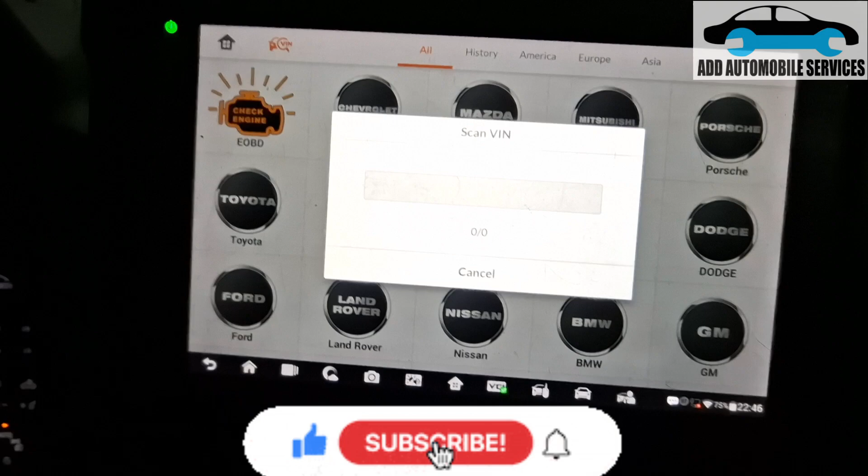So I was called to diagnose this vehicle, and the issue is the remote is not working. If you place the remote in the remote cup, it will work. Let me shut it off. You can see my light turns on. So that's the only place that it takes signal from.

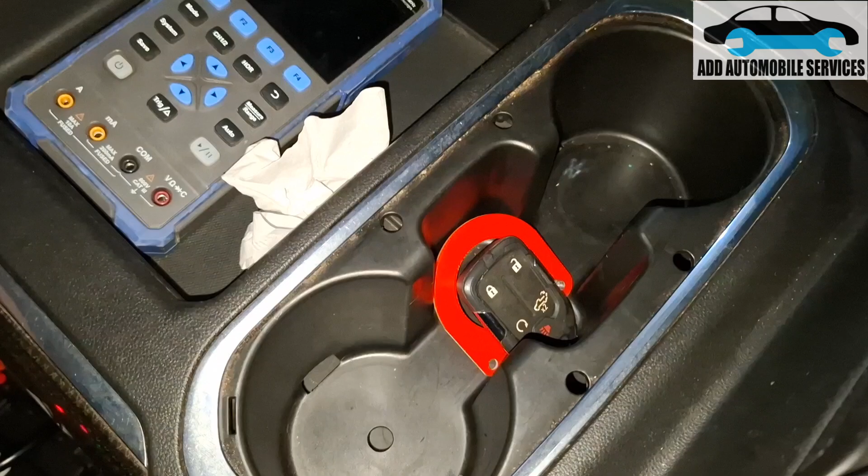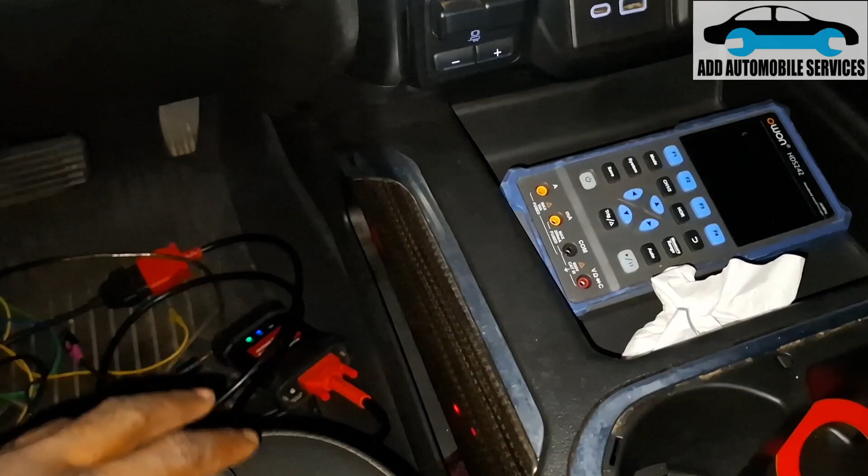With this GM, you have to turn on the key for a while, then wait for like 10 to 12 seconds, and it will turn on automatically. So it turns on when the key is in the armrest. When the key is not there, it will not work. So let me turn the ignition off. Now that the ignition is off, when you press the remote, it doesn't work.

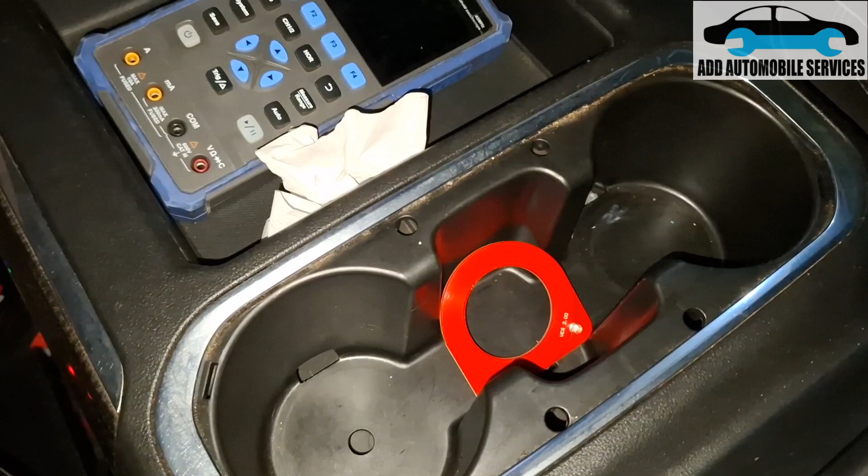So I'm here to diagnose it. I've diagnosed it, so what we did was we changed the BCM, and still the problem was persisting. The remote, you can't even turn on. The moment you try turning it on, it tells you no remote detected, and you can see my light is flashing because the remote is in the car, but it is not in the cup, the armrest, so it will not work.

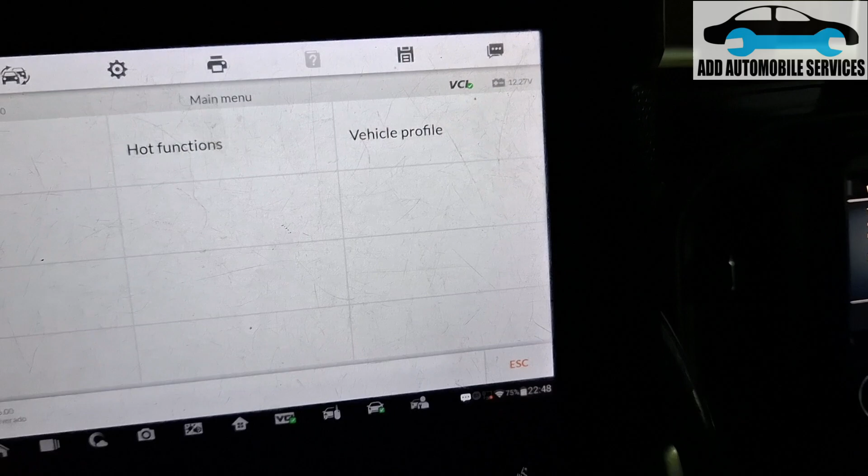So let me turn the ignition on. Before the ignition can be on, I have to place the key here. The light wouldn't flash for long, so we'll wait for that 10 seconds. Now that the ignition is on, let me select any of them and let's move to it. So when the key is in the cup, the armrest, it will work.

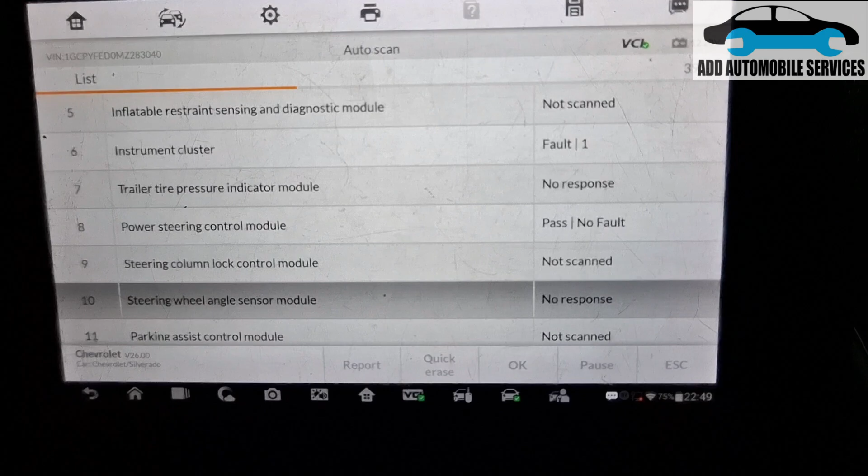And we've programmed a new BCM, and the problem is still persisting. But with this issue I was able to identify the problem, so we'll just move straight to the point so the video will be short. So you scan it and you wouldn't get any fault code in the system, and if you check online or read much about it, you won't get much information about how the system works.

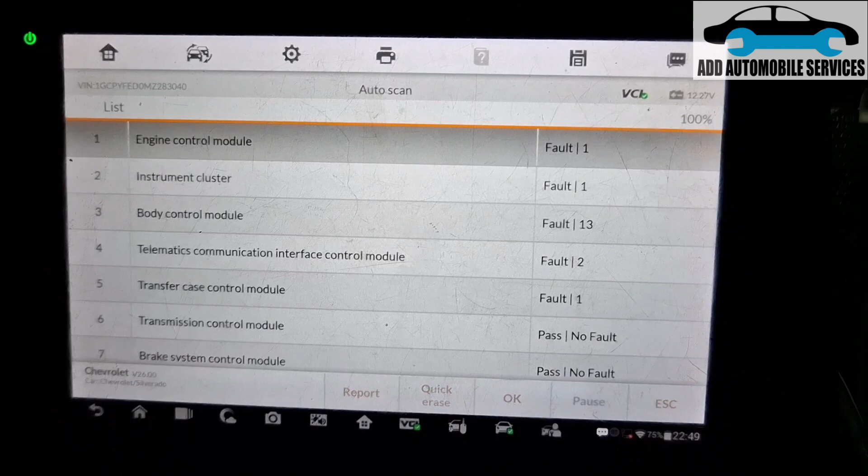So you can see I'm having 13 fault codes. Let me erase all of them. There are not any major problems, so let me erase all of them, and let's get to the main issue. After erasing all of them, you wouldn't get any issue that much. So you can see there is no fault code.

So let me turn off the ignition and turn it back on, then rescan it and see the fault code that I'll get. After scanning it again, there is no fault in the system. I'm only able to scan some few modules, so let me check why.

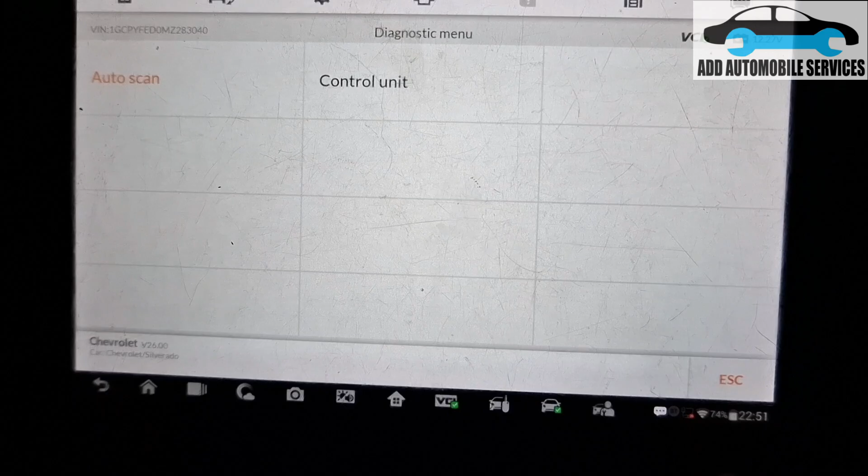Now I'm able to scan most of the modules, almost 18 modules, so I'm able to scan all of them. Let me erase all the fault codes and see the remaining one, because I disconnected the BCM. What I did was maybe my breakout box was causing the issue. I was using this breakout box, so I think that's why I couldn't scan the whole system. So now there is no fault code in the system.

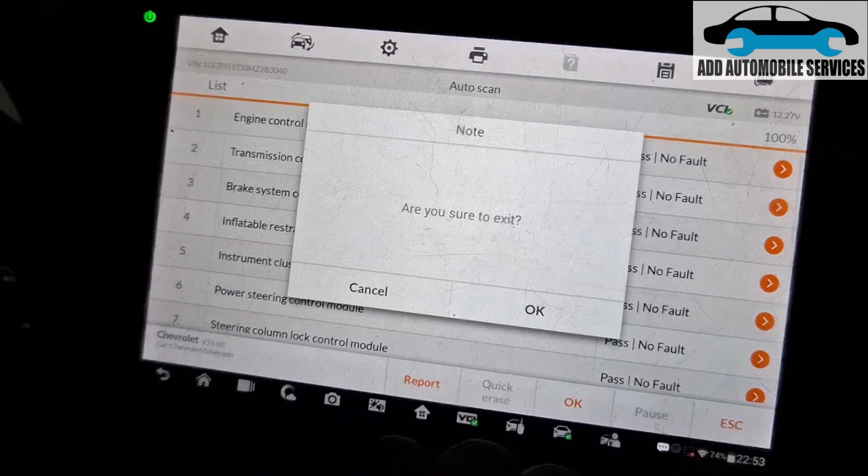Let me rescan it. This is where the issue is. There is no fault code to guide you on what to do actually, to tell you oh, this is where the issue is. Let me turn the ignition back on. So we'll wait to see.

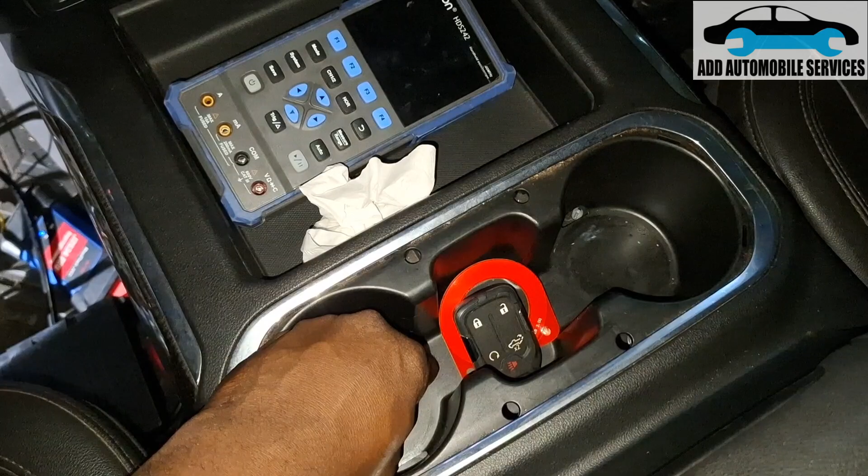I'm able to scan all those modules, and there is no fault code to guide you. Every antenna in the vehicle, there's one antenna behind the radio, it is working perfectly, and there is this antenna also. Even if you disconnect the keyless control module, this car will still start because this thing is linked to the BCM, so it will still start. The sensing unit in the cup holder at this place is linked, I think, directly to the BCM.

So even if you disconnect the keyless module, this car will still start. And this car has a keyless module and a remote control. It has a remote control receiver and it has the BCM. So these three units consist of the vehicle starting and responding, and there are other antennas in the door handles, like two antennas in the door handles. So now that there is no fault code, this is where we get stuck.

And hopefully God helped me, Holy Spirit gave me wisdom to go about it. So what I'm going to do now is test the signal on the remote control receiver.

That's what should receive the signal, the key frequency and everything. So if the remote control receiver is not receiving the key frequency, the car is never going to start. And even if you disconnect it, the BCM will not be able to see that it has been disconnected or that there is any issue with it.

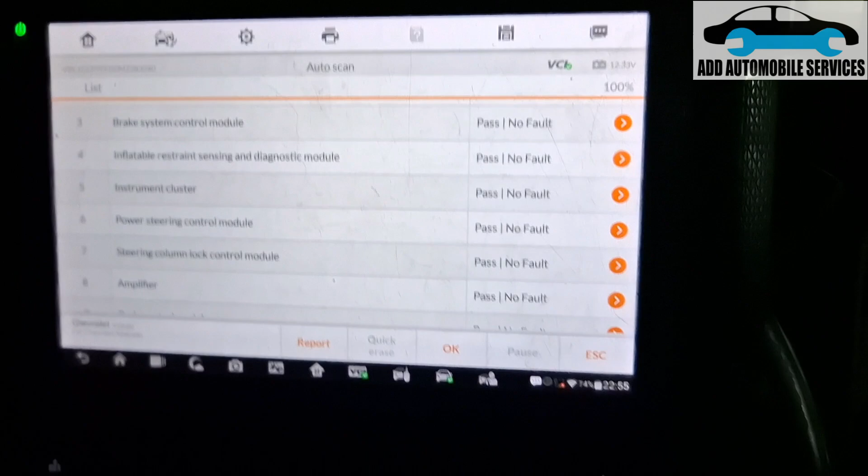So even if you check our BCM, this is the BCM. There is no fault in the BCM. Let me do it double, let me go into it again. There is no fault in the BCM. So at this point, there is no fault anywhere for us to go.

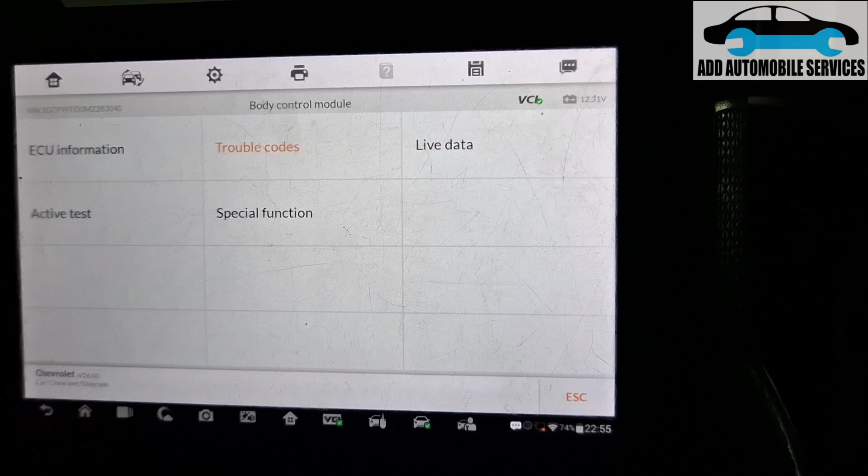So what I'll do is go and test the BCM. The remote receiver has 4 wires. Let me check, let me bring you to my wire.

So this is the keyless control module, and the keyless control module has antennas, 1, 2, 3, 4, 5, 6, and you can see this communication line. So what I'm going to do is scope this communication line anytime the BCM is active or any signal is being sent related to the key frequency and the key ID. This line, this network should be active, which is the communication line should be active.

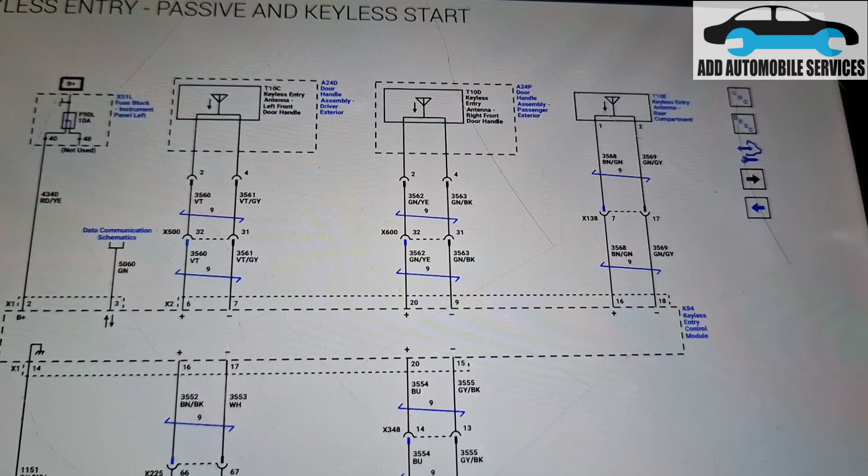So what I'll do is now let me show you the wiring diagram. This is the OEM diagram. Let me show you the wiring diagram of the antenna, of the remote control receiver. So this is the connection.

So this is the remote control door lock receiver. If you can see, it has power and ground. I've tested it and my power and ground are okay, and both power and ground come from the BCM, and it has two communication lines.

You can see it has two communication lines. There is yellow and green, then there is blue and white. So it has two communication lines. So what we are going to do is test both of them. The whole thing is, I tested both of them and they were giving me signal.

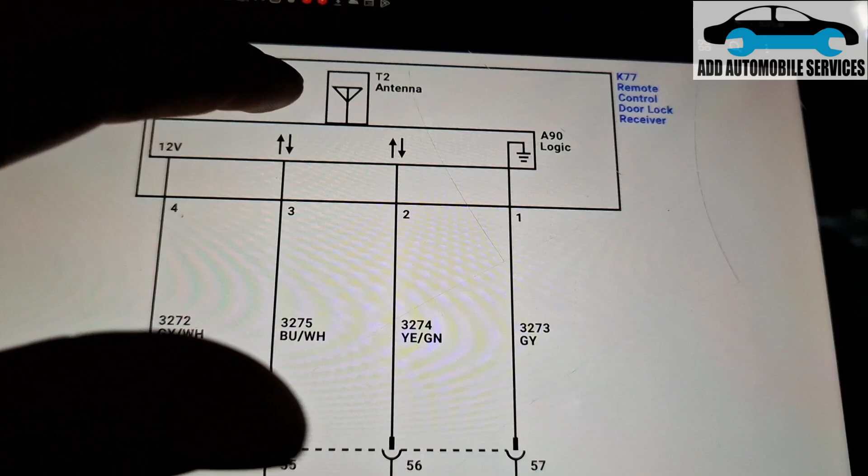So the 2 brings signal to the unit, then the 3 takes it back. But what I did was I shorted this to ground, the 3 to ground, then I started receiving signal from it to the BCM. It started sending signal to the BCM. Do you get it? So we will do that test, then we'll see the signal that it will send to the BCM, then we'll take it from there.

So now what I'm going to do is, I've tested all this way, so I'm going to test it again so that we'll see what we are talking about.

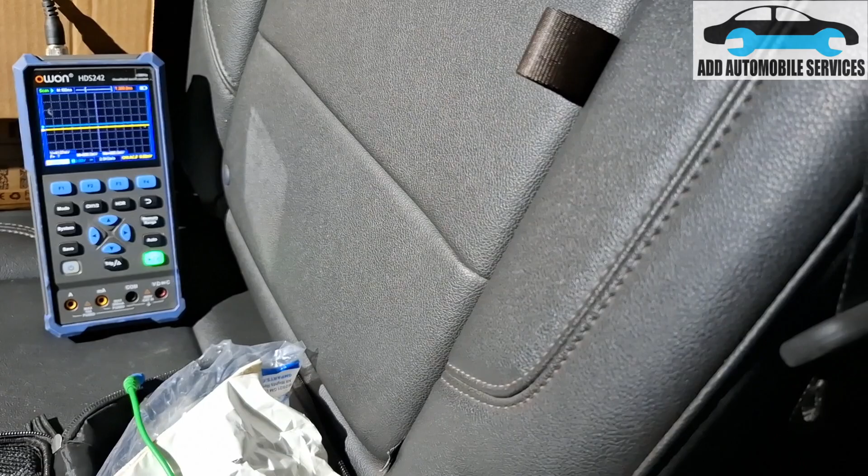So now I've set my scope up. So this one I'm going to test, one has to be power, which has to come from, so there is the location of the remote receiver.

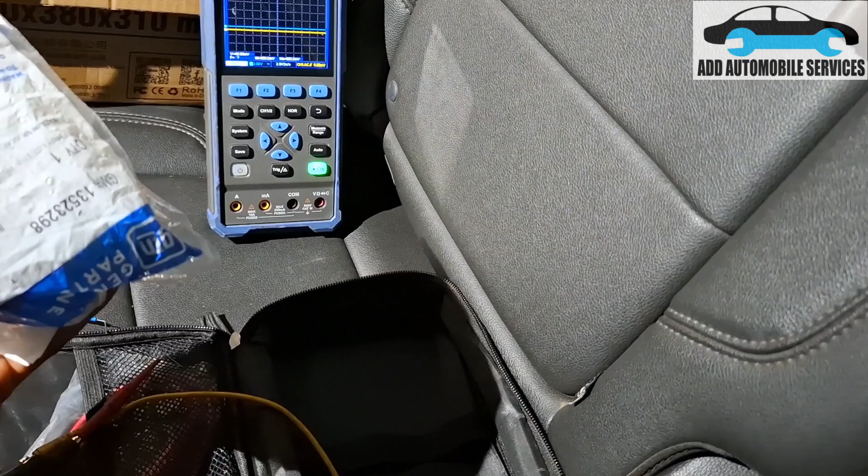So there it is. The customer already bought the BCM, and I diagnosed it and told him he should get me a new remote receiver. So he got the remote receiver for me with the same part number, and the problem was it was still not working. That means I made a wrong call and it was still not working. Sometimes you make mistakes. Same part number.

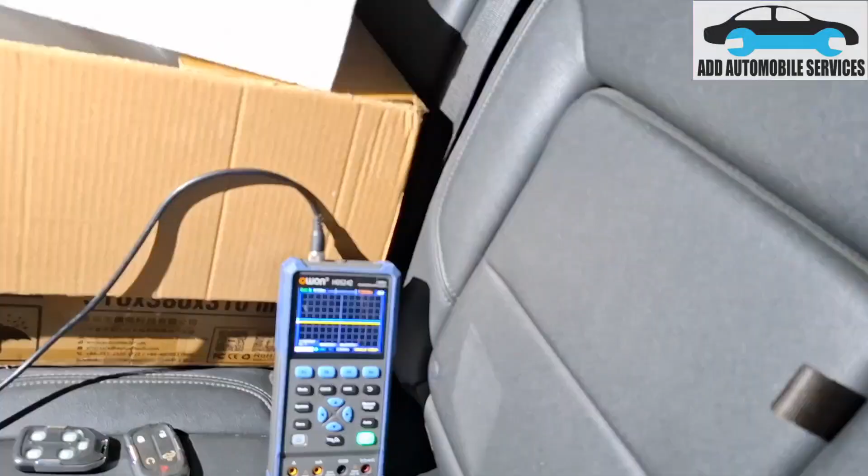So now what I'll do is let me disconnect so that we see the 1 and 4, one has power, one has ground, then the 2. So let me do it, you can see my test light turns on because I've connected the 1 and the 4. So that tells me that my 1 and 4 have power and the power is coming.

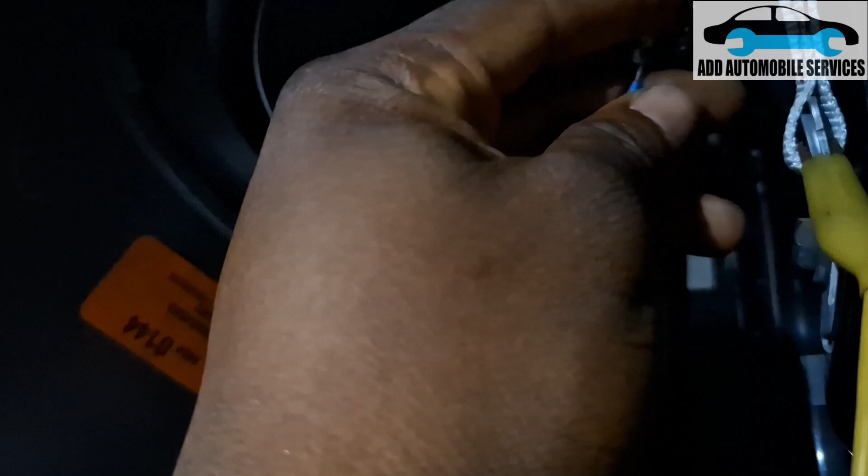So even if you disconnect this thing, the BCM is not going to see it and report any fault. So what I'll do is let me use the scope, and anytime you can see this, my scope is active, anytime there is signal, it will send signal to the BCM. So let me start and see where my power is. So that's my ground, that's the 4. If you can see the colors, that's the 4, and let's go to the 3.

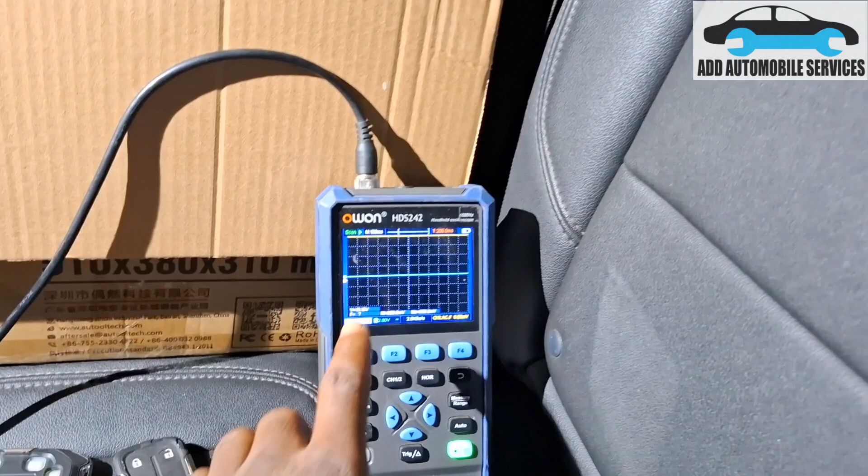So if I change my voltage, let me bring it to 5, and you can see now the voltage is around 12 volts. So that tells me that the power and ground, everything is okay.

So let me show you what we did. We are going to ground this test light, to play it safe. Let me plug this back in. We are going to ground this test light to this same body ground that we're picking. So anywhere it sees power, it should turn on, and this one is power.

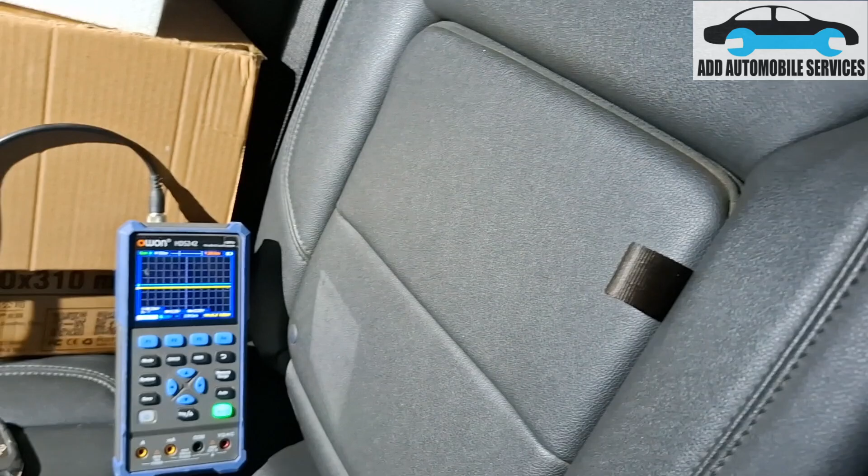So that means it turns on, and that's power. What I'm coming to do is ground it, and I'll be grounding it through there. Now I'm connecting this to pin 2. After connecting it to pin 2, now you can see I'm getting voltage on pin 2.

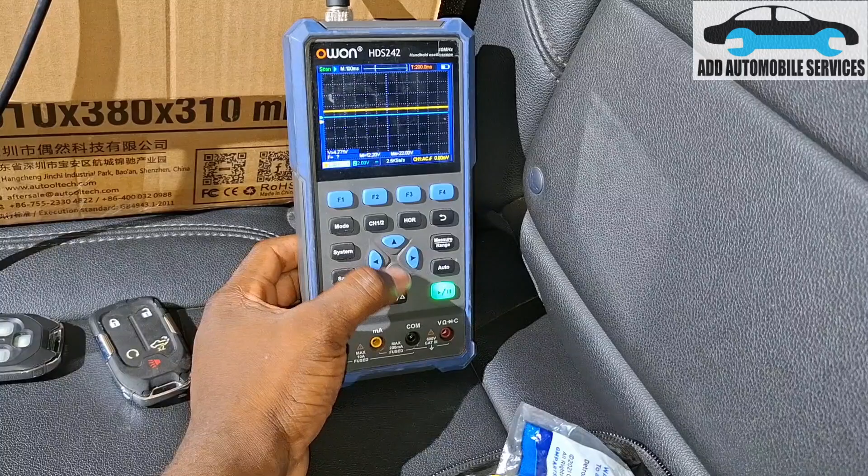Let me change my voltage. You can see now that I've changed it to 2 volts per division, and I'm getting about 5 volts, because the 5 volts is from this green and yellow wire. So what I'm coming to do now is ground it, and you can see this scope, I've set it up for communication.

Whenever there's any communication, the scope should be active. I'm coming to ground the voltage here. Let me put it on this. This is where my ground is, so let me ground it. Now I'm coming to ground it.

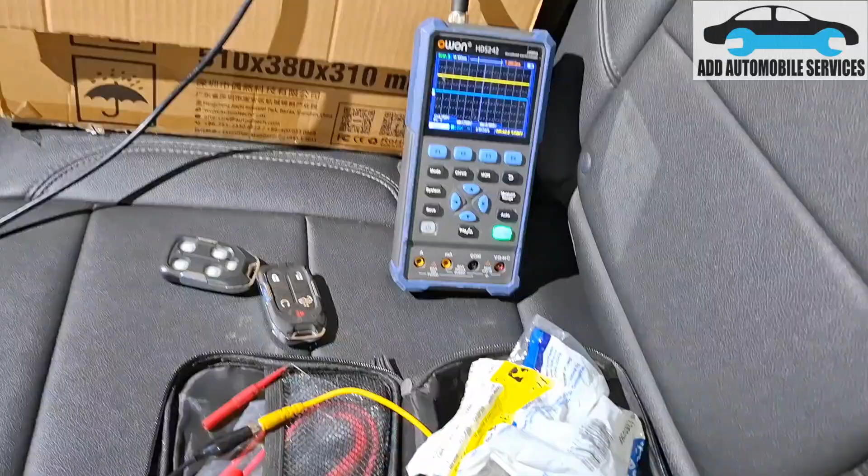The reason why I'm using the test light is that it really plays it safe here. The test light is a bit safe, because when there's any excessive current, the test light will turn on so it doesn't blow the control unit, or even the BCM, because that signal goes back to the BCM. So I'm using the test light, which is safe, so that whenever there's excessive current, it takes that current and turns on. My test light handles 100 milliamps, so any current above 100 milliamps will turn my test light on.

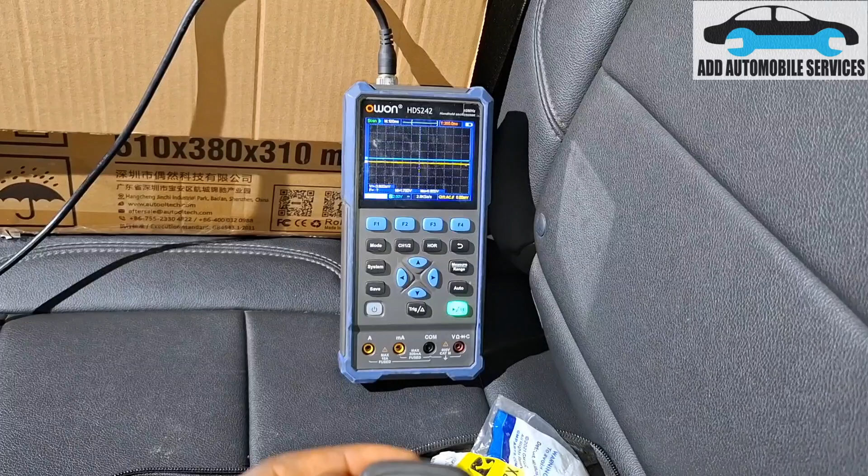Now what I'm coming to do is press the key, and you can see the moment I press the key, there is communication on this, and there's nothing here, although I've grounded it. Because I've grounded it, there is nothing here, and you can see there's communication.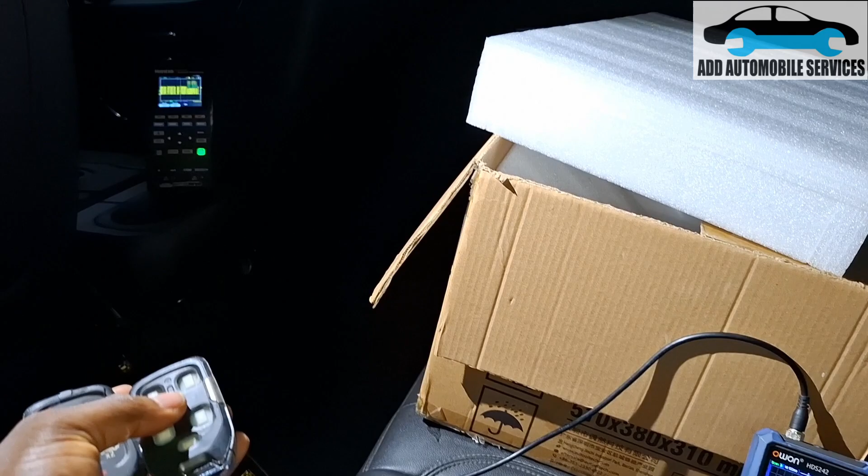Let me change my scope time base to somewhere we can get the communication quickly. So now you can see my door locks and unlocks, because I have grounded it, and you can see my scope is reading, which tells me that the BCM is up and there's communication on the low speed CAN, which is the GMLAN.

So when I come back here, let me do double unlock, and you can see the car just honked at me. The moment I disconnect this ground, you can see the voltage is up again, and this thing will go to sleep. The moment it goes to sleep, that means there will not be any communication.

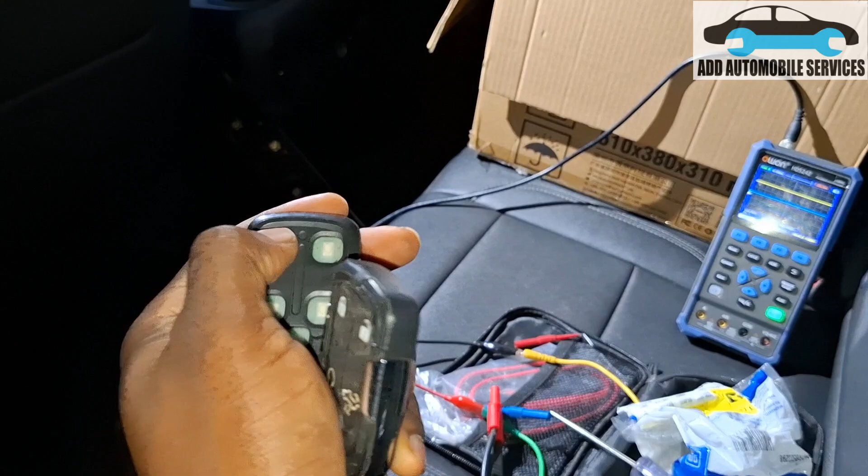You can see I'm pressing the remote, but nothing is working. Normally this car too has this, so when you press it, the system should be up, but it's not receiving any signal from the remote. So you can see the remote doesn't work, nothing is working, and the signal is out.

But see, the moment I ground this thing, it's not giving me any fault code in the BCM. Now that it's grounded, and I'm seeing it on my scope that it's grounded, when I press the unlock button, my CAN lines come active, or let me say my communication lines come active. So this is another communication for GM. You can see I've unlocked it, and let me lock it, and you can see it's honking. So when I disconnect it, it will go off.

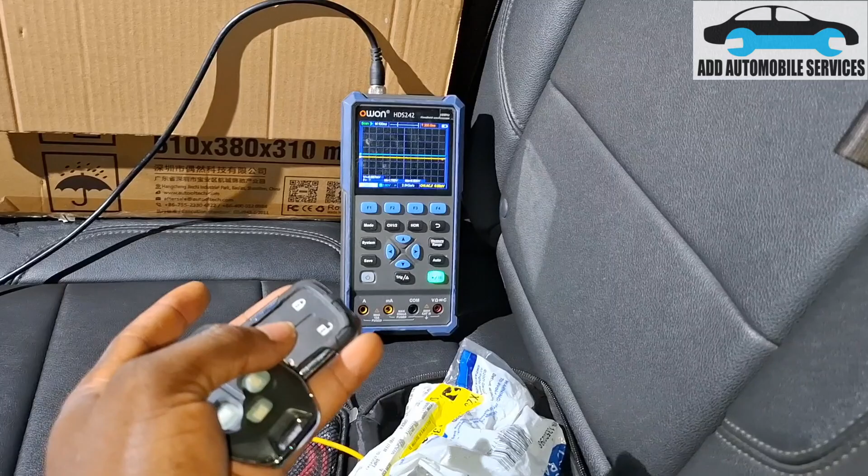I don't know why the BCM is not supplying that ground, or if it's the unit that has to supply the ground. Really, I can't tell, because if I fix this one, it will still happen the same way.

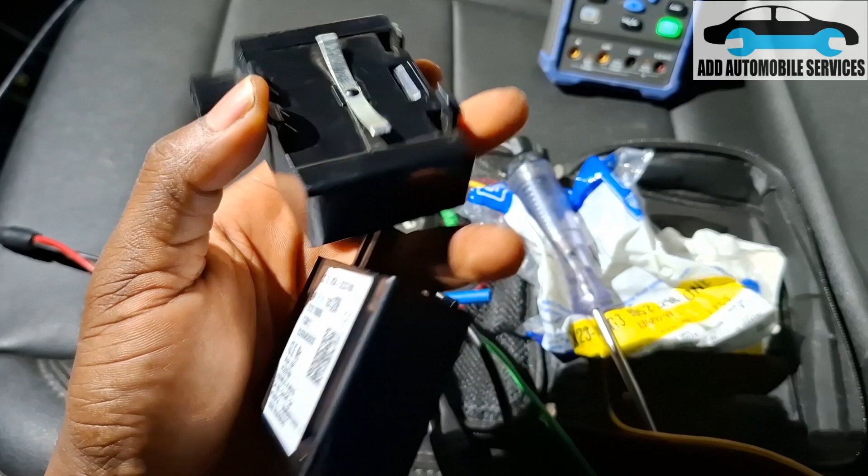So I had to do that myself, because the customer bought it, so I have to pay for it. This is the new one, and this is the used one. When I was removing it, I didn't know how it was fitted, so I broke this leg. So this is the new one. Let me fix this new one to that source and short it to ground.

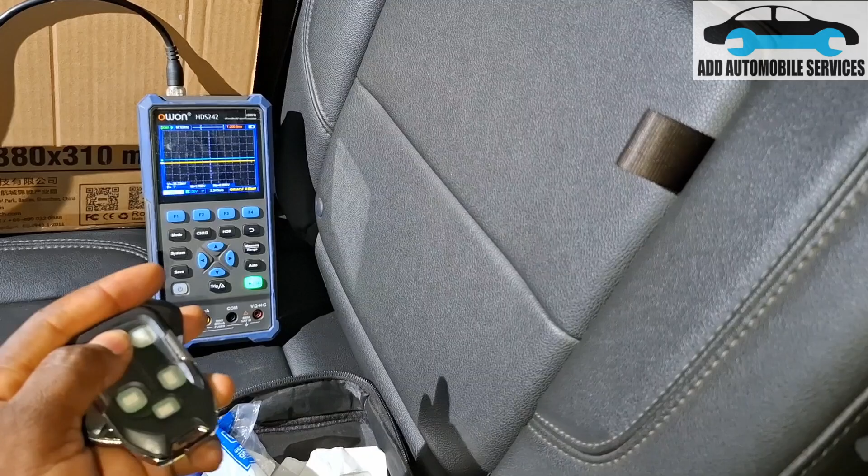Now that the new one is fitted, you can see it's fitted, and let me press the remote - the network is still asleep. There is nothing working here. So when your receiver is faulty, this is the kind of problem you'll be having.

But the moment I short it to ground, you can see the line is up. Now that I've shorted it to ground, when I press, you can see my inside light turns on, and if I unlock it, my inside light turns on, and that tells me the issue is from the ground. When I double click, the boot opens, and I have to close it.

I don't know what to do. I don't know if I should give it ground so that the remote will be working, or if I'm going to do more research on it, because you don't get more information on how to go about it.

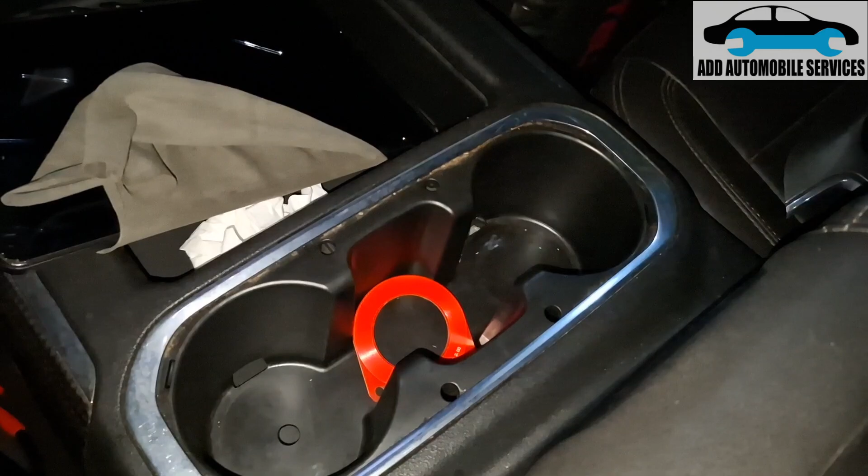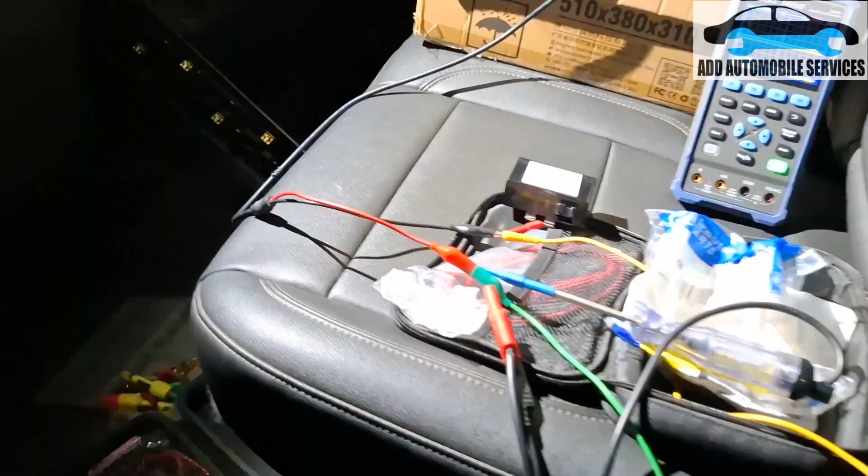So after running, now that the car is running, let me see if I'll find any fault in the system. I don't feel any temperature getting higher, and my test light is still off, and you can see the communication line is going on perfectly.

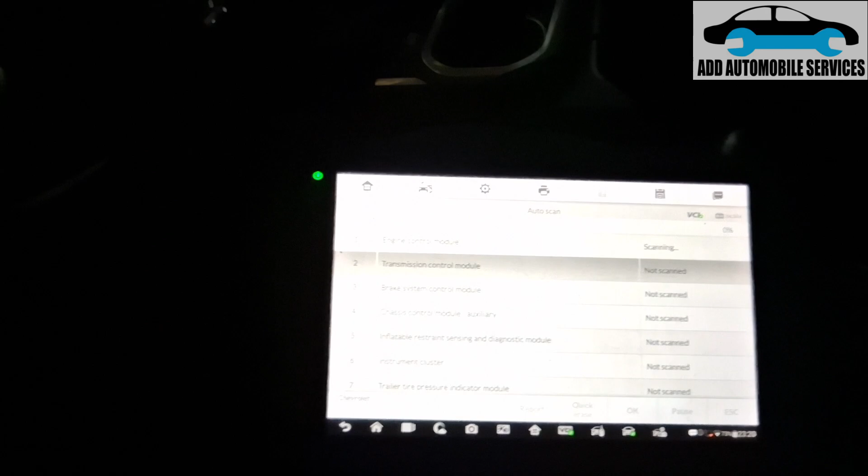So now all I need to do is rescan the system and see if I'll find any fault. If I don't find any fault, then I have to find a way of adding ground to that wire for it to work, because all the customer needs is his car working and the remotes working. The kind of pressure they're giving me - I've not slept for 2 days on this car just to find the problem and fix it.

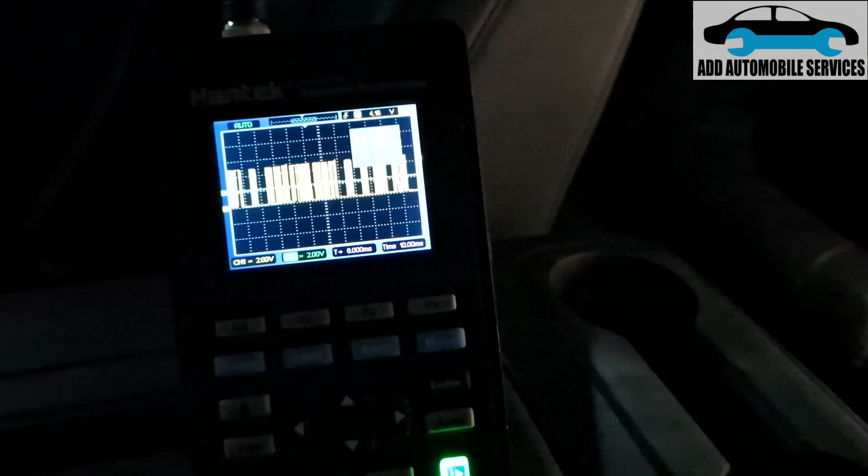So let me see if there is any fault after giving it ground, and you can see that there is no fault. So still the 18 control modules, and there is no fault, and my can line, my speed, my GMLAN line is okay.

So now what we've done is we've shorted this one to ground - that's pin 3, blue and white. We've shorted it to ground, that's pin 3. Pin 4 is the one that has 12 volts on it. So we've shorted pin 3 to ground, and the system is now working. I really don't know why, but when we shorted it to ground, it is now working.

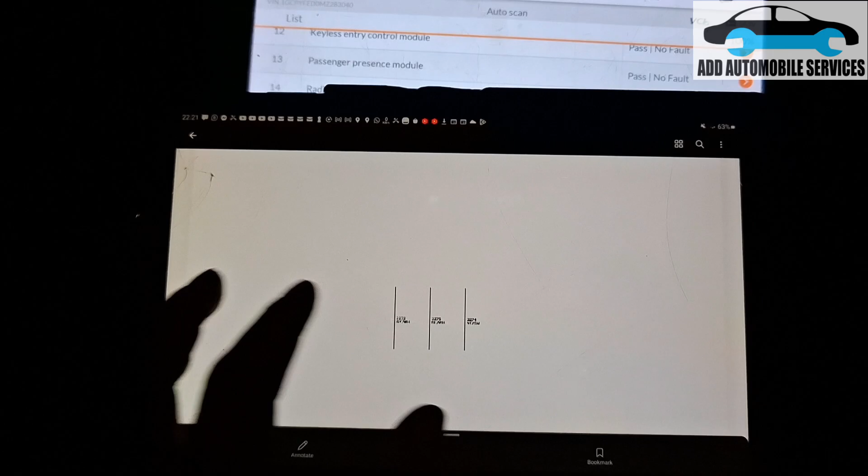So I don't know if the BCM has to ground it and the BCM is not grounding it. What I'm going to do now is - I'm done with it - I'll just find a place to tap ground for it so that it can work for now. I think it's on X1 pin 26, so that's what I'll do. I'll search for it and tap ground for it, then see why it's not working.

Even if you disconnect it, it will not give you any fault.

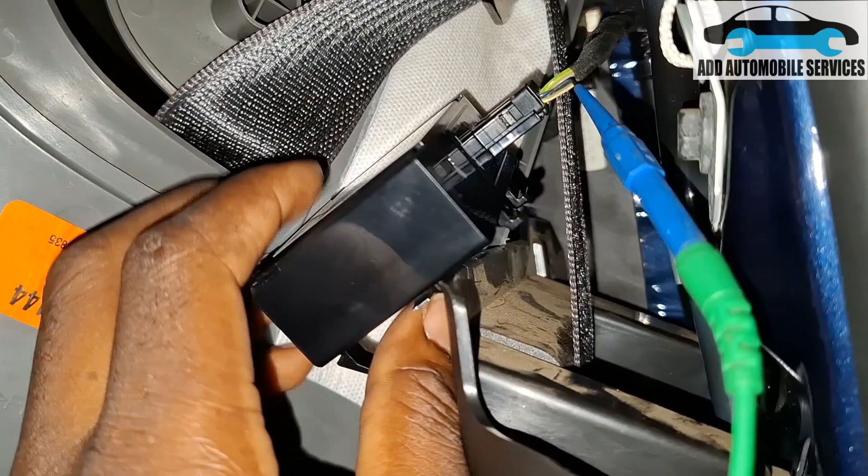So now that I know the issue is ground that is not going to this unit, what I've done is I'm trying to do continuity testing, and my multimeter is on continuity. So whenever there is continuity, there should be a beep.

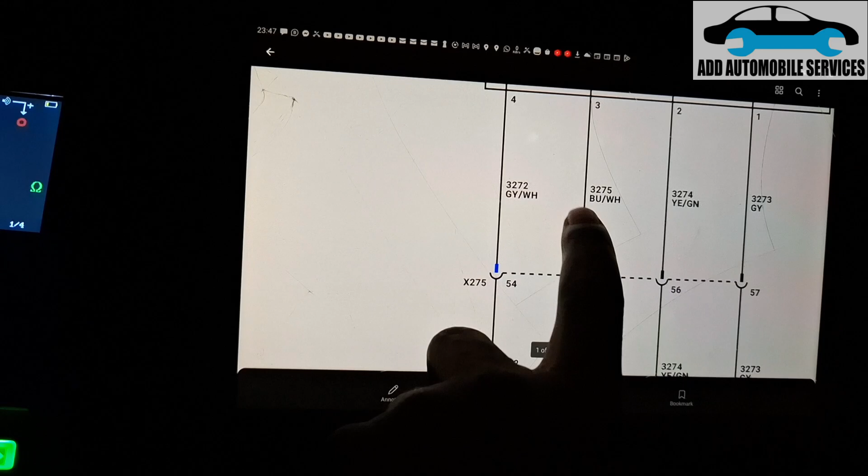So what I'm going to do is trace on this blue and white wire too, and you can see the OEM diagram shows me that there is a connector here. So I have to also trace the connector, but before that I have to test continuity from this point to this point. But now my probe is at this point, so I have to check this point from the BCM.

So that's pin 26. Now what I have to do is check continuity on this wire, which is this blue and white, which is 26 as it's saying. So this white connector is the X1, so I have to check, and there is 26 written on it, so I have to check this one. So we'll check and see if I'll get continuity.

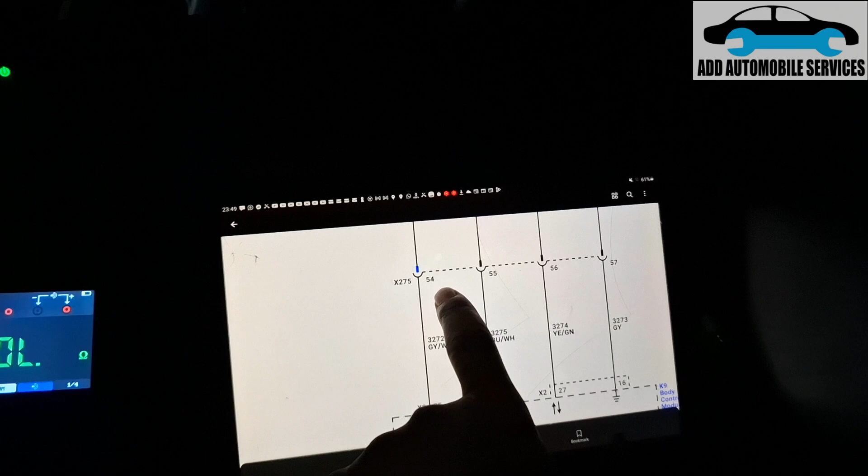And now I've connected it to it. So now I'll see if I'll get any continuity. There's no continuity. So what I'll do is jump from this side to the wire and see if the sensor will work. If it works, then that means there is a break at this point, which is this connector. So I have to find this X275 and search why that connector is not connected.

So let me do that, and now I've disconnected the ground. So there is no ground wire here, because of the continuity issue. So now let me just tap it here and do the connection and see if everything works. Then I have to search for this connector.

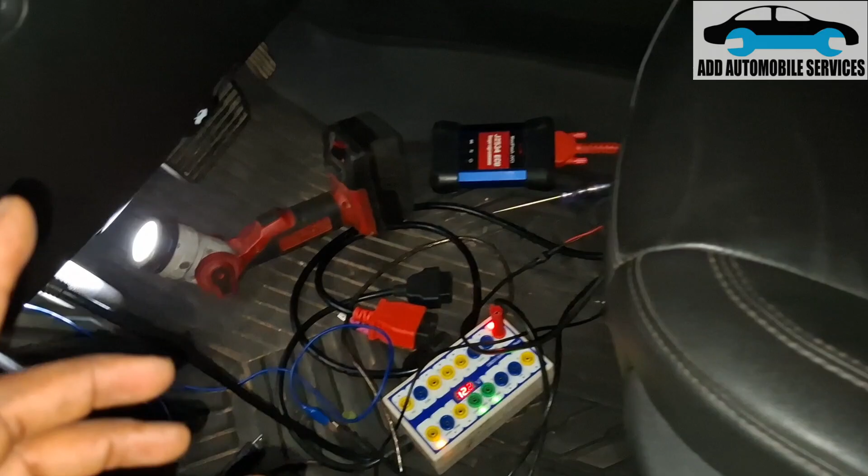So now what I've done is I've connected the sockets back. I'll just jump this to this side, but before that let me leave it this way and test the remote and see. Nothing is working. My remote, nothing is working, and the moment I press the push to start button...

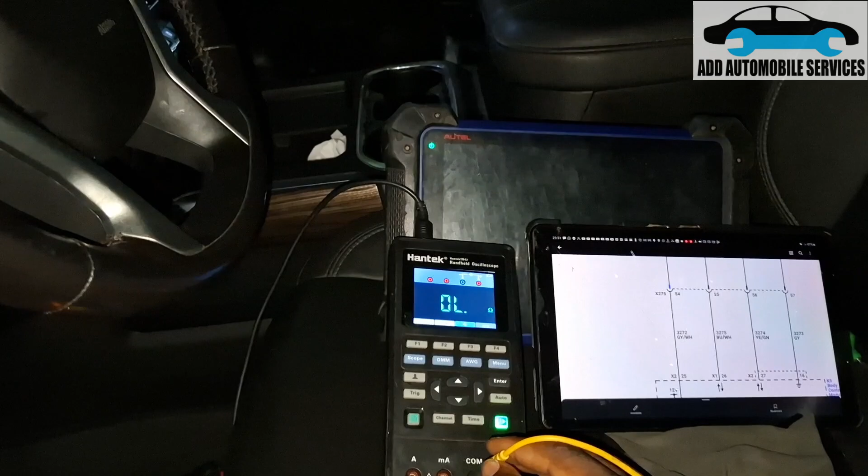The moment I press the push to start button, my device in the hole shows no remote detected, and my device in the hole is also flashing, you can see. So now let me do the jumping and see if it will work. If it works, then that means there is a break at that point.

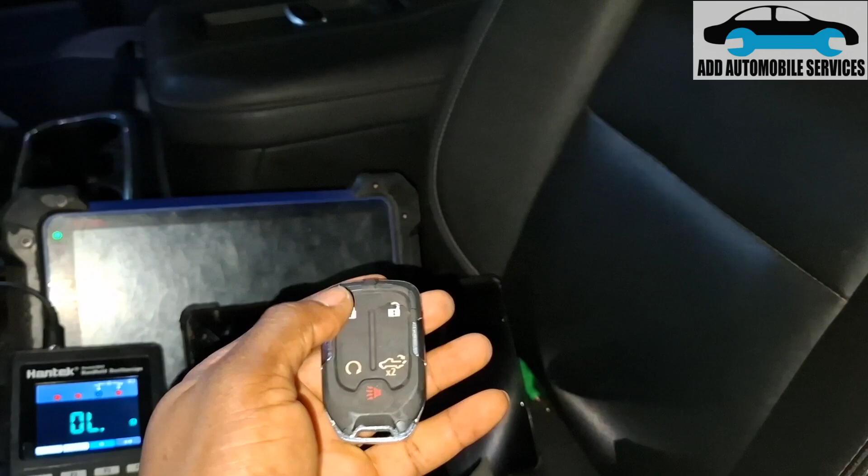Yes, and it is working. So you can see, it is now working perfectly after I jumped the wire from this point to the back there. So now the remote is working perfectly. So at this point I know the issue. Yeah, all the two remotes are working perfectly, so I know the issue is from that.

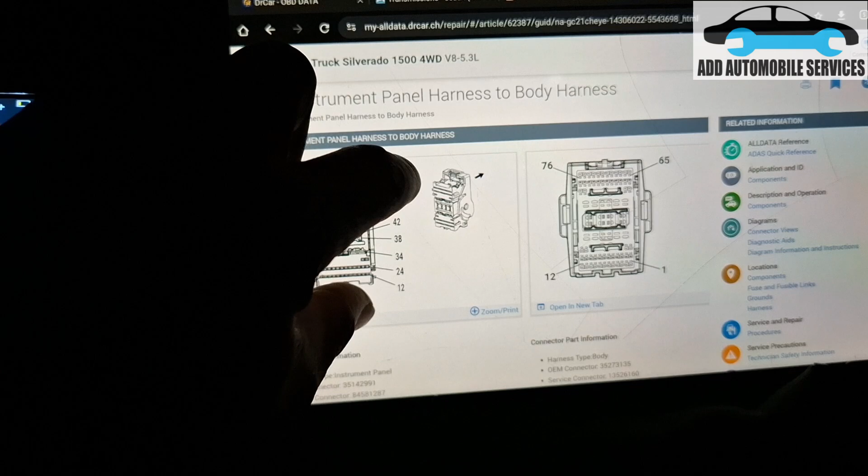So now I know the issue is from this socket. The issue is from this socket. So let me go, and so this is the socket. This is the socket that I have to search for, and my issue is at pin 55.

So this is 65, so that means it will be at this point. So I have to search for it and see why it is behaving that way. So it's the connector issue. So now that I have jumped it here, everything is working perfectly, and I don't need to send ground to the unit again. So now I think what I'll do is scope it.

And see the signal that I'll get. So now you can see my scope is at 0. Let me ground my scope. Okay, so now my scope is at 0, and I've connected the wires. I've jumped the wires, so from the back to the unit here. So I've done that connection.

So my scope is at 0, and now that means it needs ground to work. So everything is working, so I can have the remote with me. As I have jumped it, the remote is on my thighs, and I can start the car, and it starts perfectly. So then I have to search for that connector.

Yeah, so I have to search for that connector. So now everything is working perfectly. And even so, the whole issue is, if that thing is disconnected, you are not going to get any message to show you that there is the issue. So I think it is due to the connection.

So now I'll find that point, and I'll call it a fix.

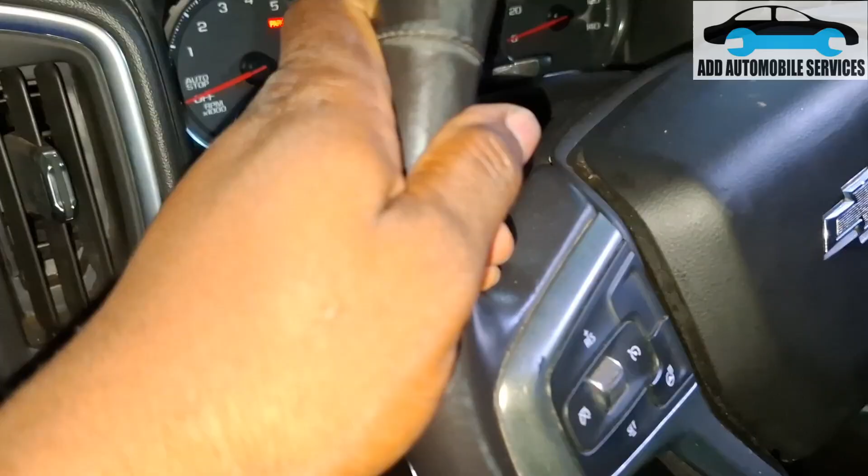So this tells me that everything is working. Now all I have to do is search for the socket and work it out.

This is the location of the socket from the wiring diagram that I'm seeing. So if you can see these two things, I'll take this socket out, then test and see if I get the signal here. Then I'll see why the signal is not going to its destination. Maybe I'll continue my tracing.

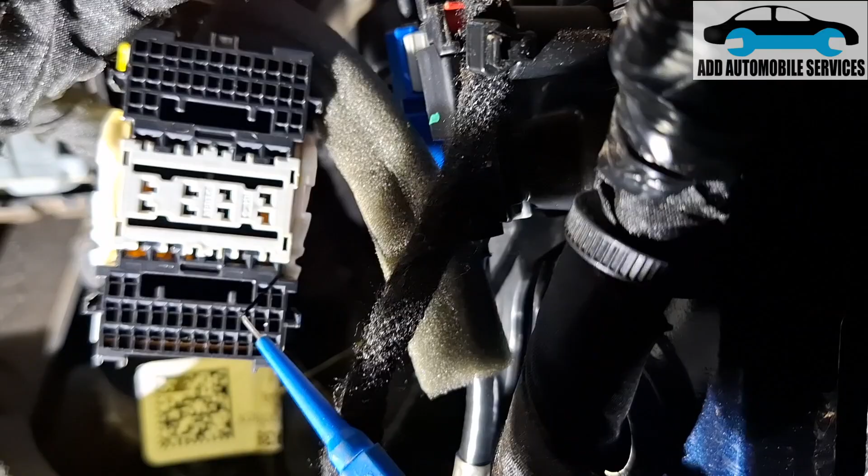So now I found the pin, it's at this pin. That's the 55, and you can hear the beeping sound. So now I have to trace from this point back to the unit and see where the actual problem is.

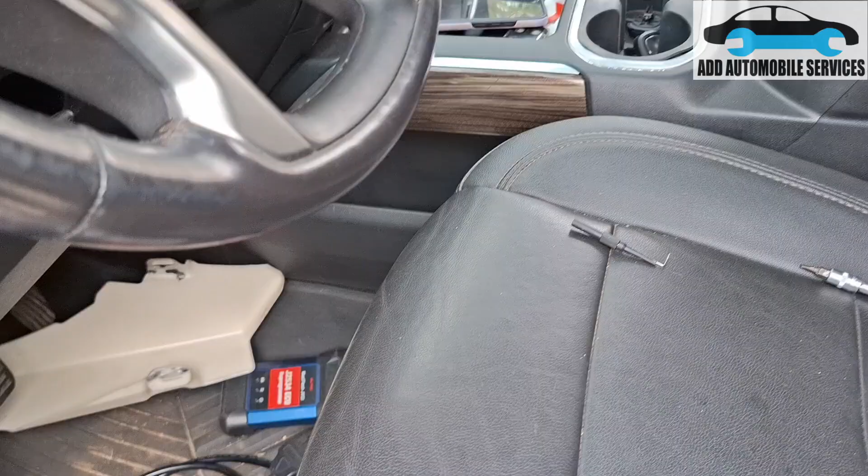So this morning also I traced this goes to this point. It goes from the BCM to the junction box here, passes through the dash, and comes out here also. I checked here and it was beeping, which means I have to check through.

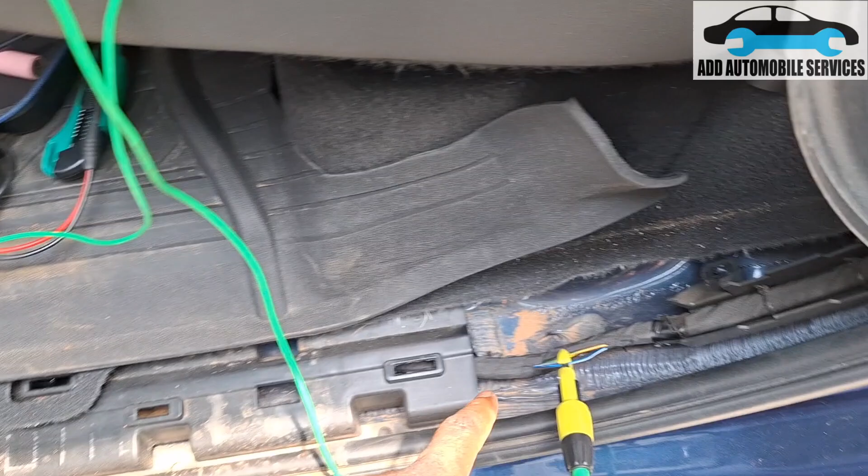I have to check through the lines, and I came to check here. It is beeping, I think it's a contact issue. It's beeping from here to this side.

This tells me that from this point to this point there's continuity, to the sensor itself, to the receiver itself. So the break could be at this point, at this line. That's what I'm coming to check.

That means I have to remove all this cable and examine and see where exactly the break is, because you can hear the beeping from the back. If I test it here, there's continuity from this to this. It works all right.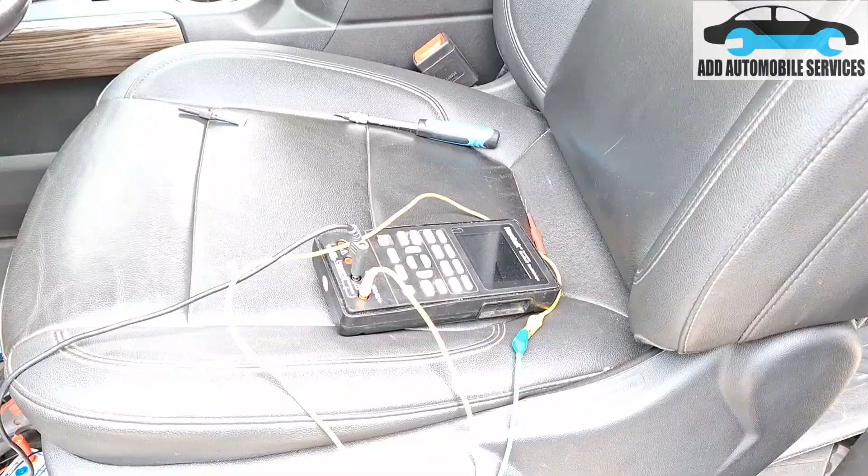Now that I've done the connection, you can hear the multimeter beeping, which means the break will be within this side. So I've come to remove all these things and check where exactly the break will be. Now I've narrowed it down.

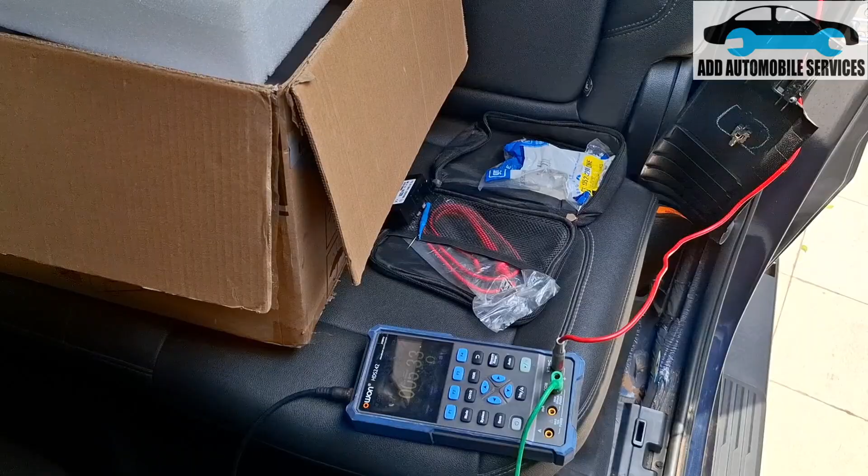I'm testing here at the BCM, and you can hear the beeping, which tells me that the continuity is okay. There's continuity from there to this side. So what I'm going to do is, that means the break will be from this point to this point. That's where the break is.

So now I have to remove the whole wire and identify where the break is, but I'll be doing it bit by bit so that I can get the actual place that the break is. So you can hear the beeping now.

So what I'm going to do is come to jump it to see if the vehicle and everything will be working for now. So now to verify my fix, I've jumped this point to this point. Now let's see, you can see the car is working.

Everything is working now, and I'm having the key, and the ignition can even easily turn on. That tells me that the ignition turns on whilst the key is in my hand. So let me turn it off.

So I have to cut these wires and find where exactly the break is. Now, as I said, the issue will be around this side.

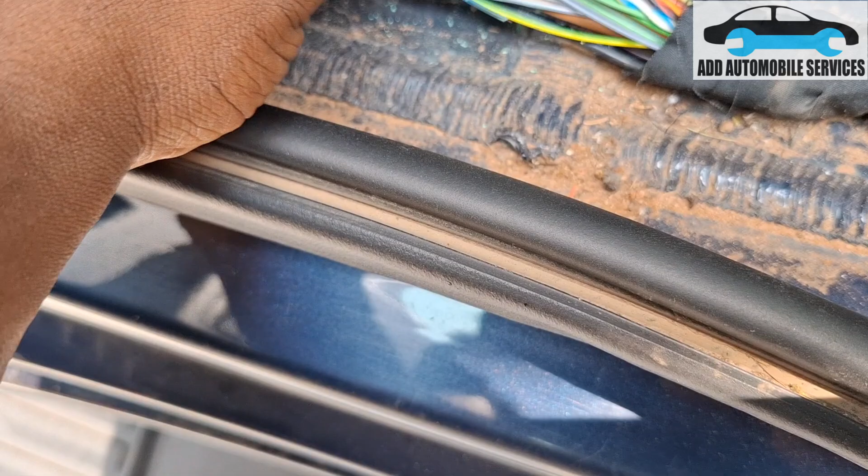When I opened it up, you can see the damage here. This is the wire, and you can see the damage. So when you pull it from this side, you can get it. This is where the break is, and there is the other wire. I have to examine and see.

That's why I wanted to diagnose and find the actual place. It looks like the wire has corroded, and it was a time bomb, there is nothing else wrong. I'll join the wire here, then clean this part and re-tape it, and make sure no other wire is affected. I don't know what happened or what pierced it, but if you look, it is damaged.

So what I'm going to do now is join these two wires, and from my point of view, nothing happened to the rest of the wires. I don't know how it happened, what happened, but water went into it and cut the wires or damaged the wires.

So now what I'll do is join these two wires and my problem will be fixed, and now the remote will start working, everything will start working.

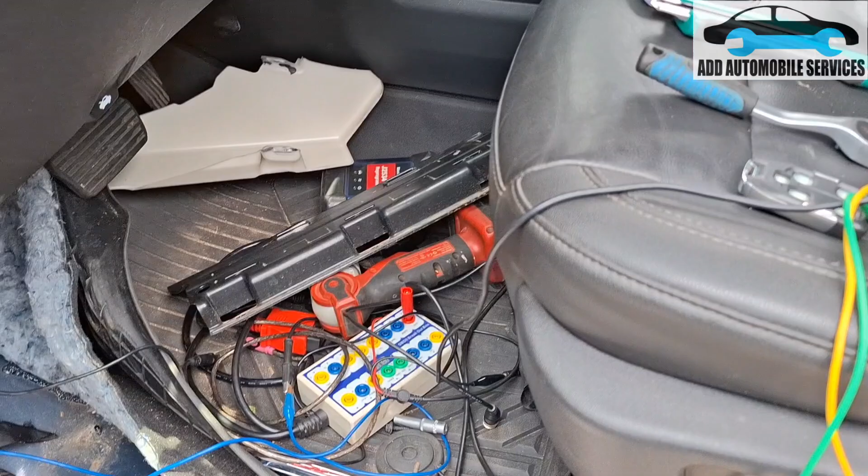So I'll do the joining of the wires. You can see that I just turned this part, and that means the wire is really corroded. So I just have to join the wires, find another wire, or use heated insulation to do the joining. Then I'll call it a fix. Then I'll check the signal on that side, then fix everything back.

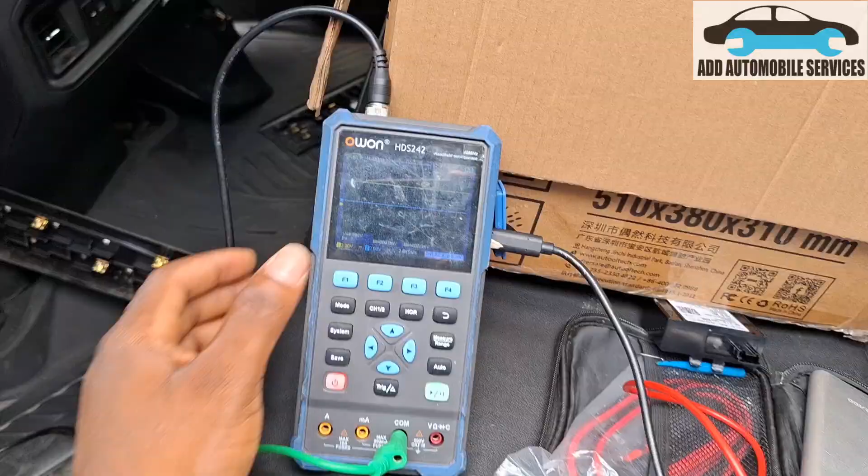Now what we are coming to do is, you can see my scope. This is the receiver, so I'm on pin 2. Let me check my wire, so this is pin 2. I'm doing this video so that anytime I face this issue, I know what to check for. So this is pin 2, and you can see I'm measuring a voltage of, let's say, 5 volts. So let me go to pin 1 after getting your power and ground.

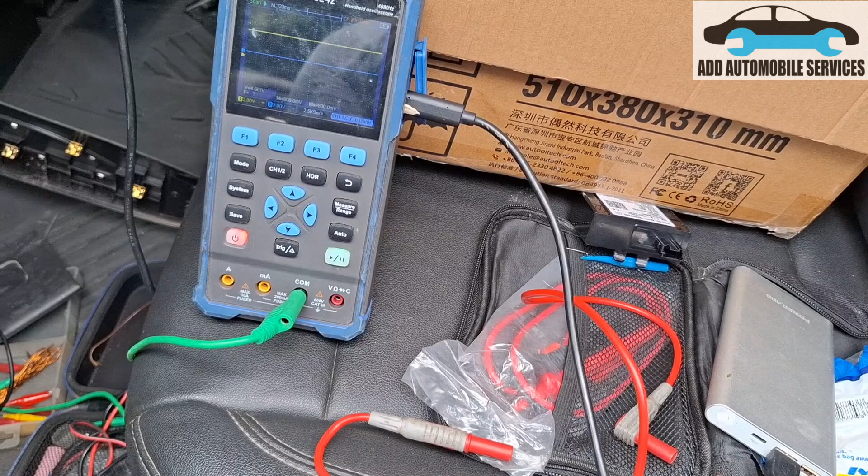And pin 1, you are getting a feed from the control unit, because now I've disconnected the wire which connects. So pin 3 has to connect to the BCM, and if it is not connected to the BCM, this is what you see. So now let me connect the BCM cable and see the voltage I'll get on this.

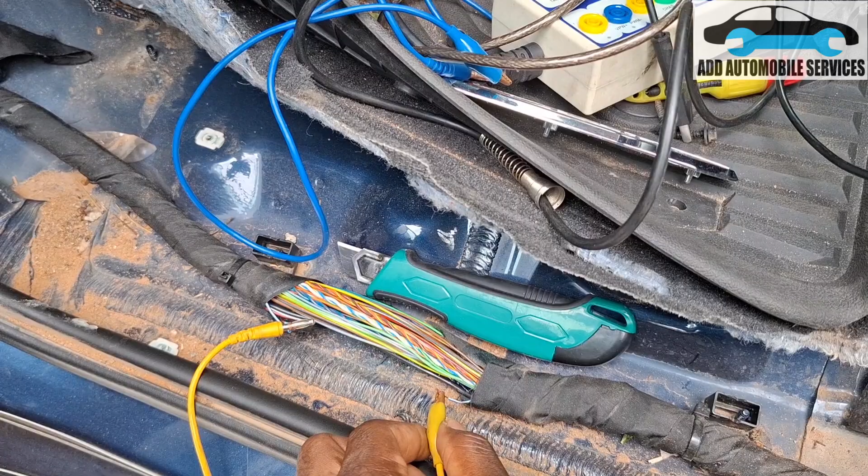You can see I'm getting the feed from pin 3, pin 2. So let me connect the cable. This is the broken cable, the BCM cable, the cable that connects the BCM and the RF, the BCM and the remote control receiver. So now that I've connected it, you can see the signal that we are getting on that line.

So this is the signal. Let me move it so you can see it properly, I'm on pin 3. So now let me move to pin 2, and it should be the same signal when it is grounded. You can see the same signal.

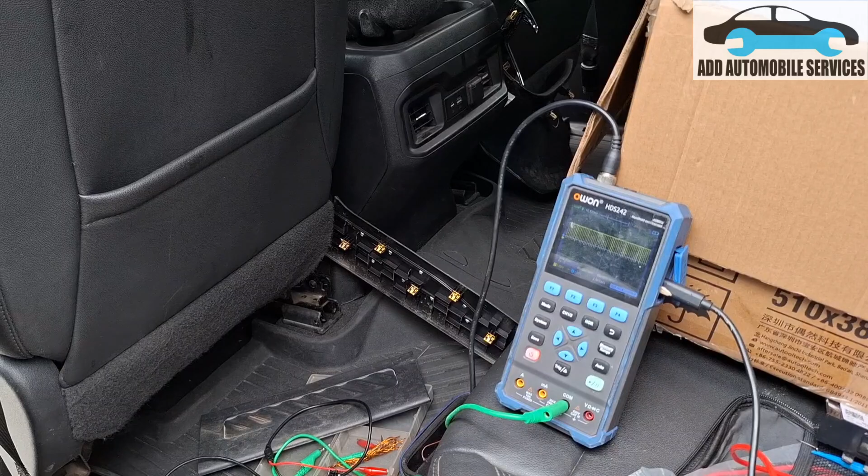Now I have the remote key with me. So the moment it signals the remote key, you can see you are getting some signal, because now it's seeing the remote inside the key, inside the car. When it is outside the car, you don't get any signal. But when it is inside the car, that's where it starts to give you the prompt searching for the key.

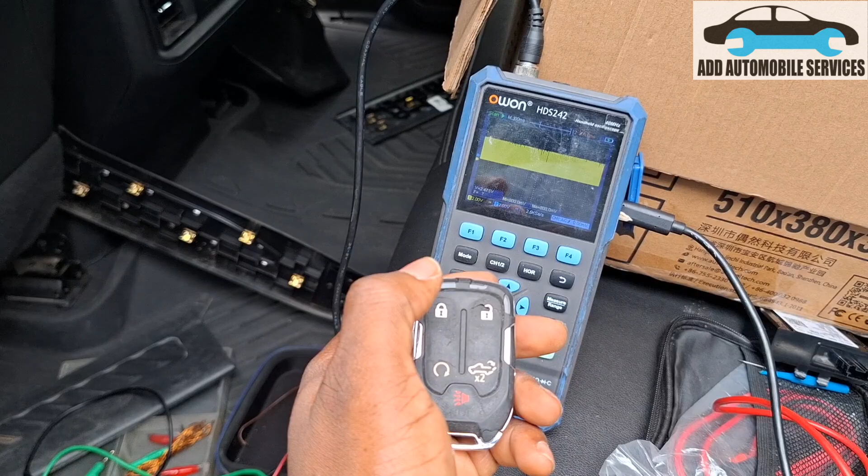So now what I'm coming to do is, I've not even pressed it. You can see it comes in anytime it sees it inside the car. So now let me press it and let's see the communication we are going to get. Yes, so you can see it has changed and everything has changed.

So if I want to, I can change my time base so that I can get it clearer, the correct signal. Oh wow, this is a horrible signal. I don't know if it's interference or something. So this is the signal you are getting.

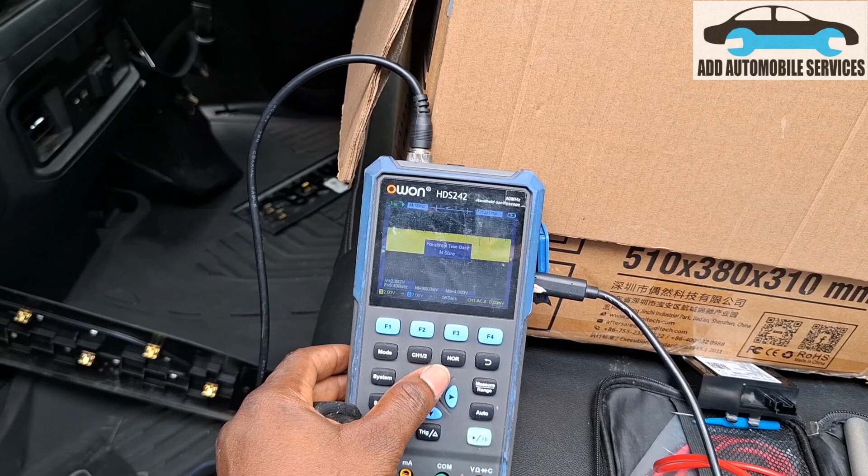So if everything goes to sleep, you start seeing it one by one. And now the lock and unlock button, you can see the unit comes up and goes down. So it's now working because of the wire. So anytime you are doing this, you have to be very careful. Check your signal lines, it was a straight line.

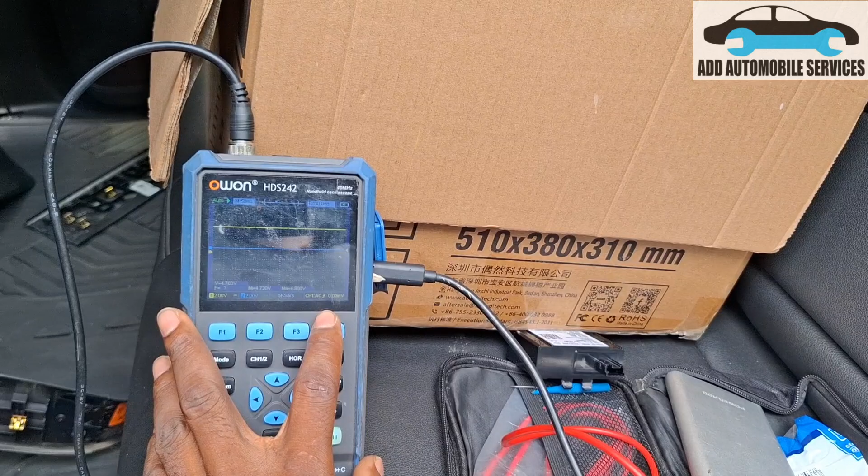So now that there is communication, let me disconnect that wire. When I disconnect that wire, you see it to be only a straight line, whereby there is no communication between the BCM and the radio receiver because of pin 3. Do you get it? So now you can see it's just a straight line on both pins.